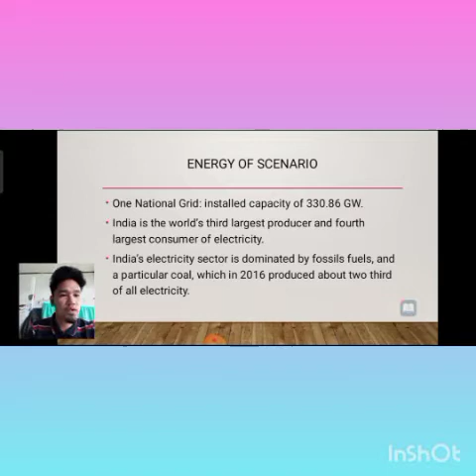India's electricity sector is dominated by fossil fuels, particularly coal, which in 2016 produced about two-thirds of all electricity.

Thermal power plants. A thermal power plant is a power station in which heat energy is converted to electricity. Typically, water is heated into steam, which is used to drive an electrical generator. After it passes through the turbine, the steam is condensed and recycled to where it was heated.

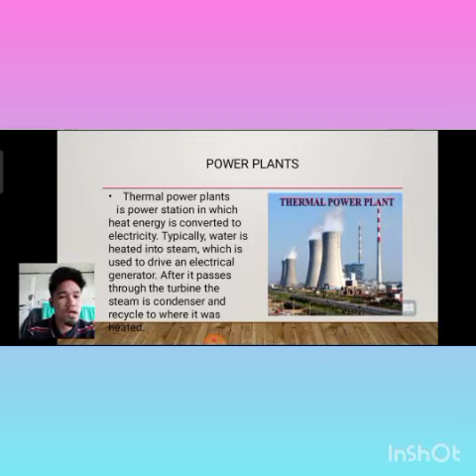Hydropower plant, also known as water power, is the use of falling or fast running water to produce electricity or power machines. This is achieved by converting the gravitational potential or kinetic energy of a water source to produce power. Hydropower is a method of sustainable energy.

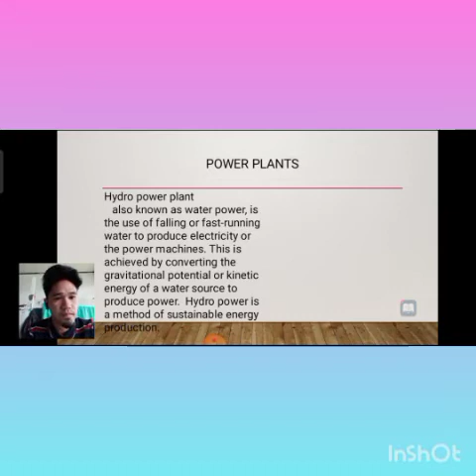Steam power. Steam power plants consist of a boiler, steam turbine, generator, and other auxiliaries. The boiler generates steam at high pressure and high temperature. The steam turbine converts the heat energy of steam into mechanical energy. The generator then converts the mechanical energy into electrical power.

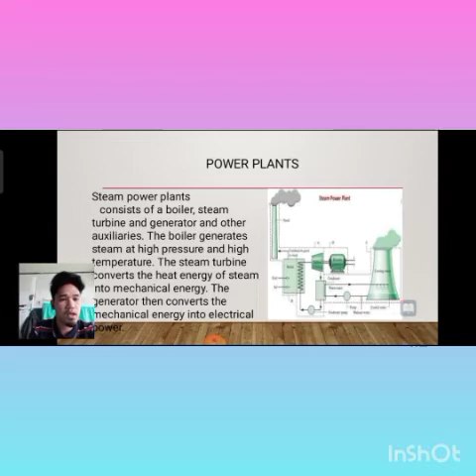Gas power plants. A gas-fired power plant, or gas-fired power station or natural gas power plant, is a thermal power station which burns natural gas to generate electricity. Natural gas power stations generate almost a quarter of world electricity and a significant part of global greenhouse gas emissions and climate change.

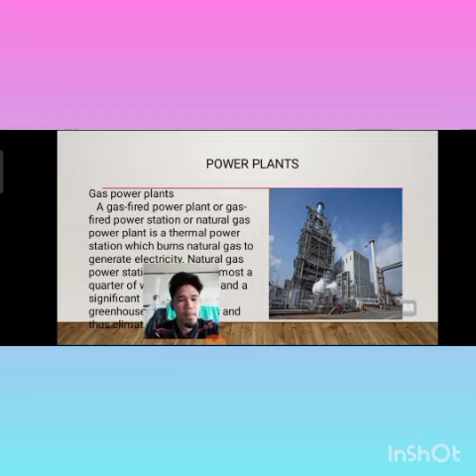Hydroelectric power plants. Hydroelectricity or hydroelectric power is electricity produced from hydropower. In 2015, hydropower generated 16.6% of the world's total electricity and 70% of all renewable electricity, and was expected to increase by about 3.1% each year for the next 25 years.

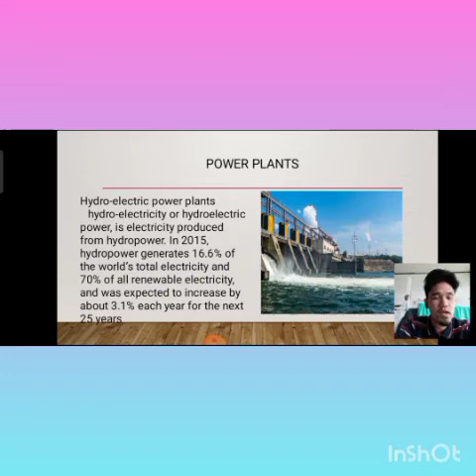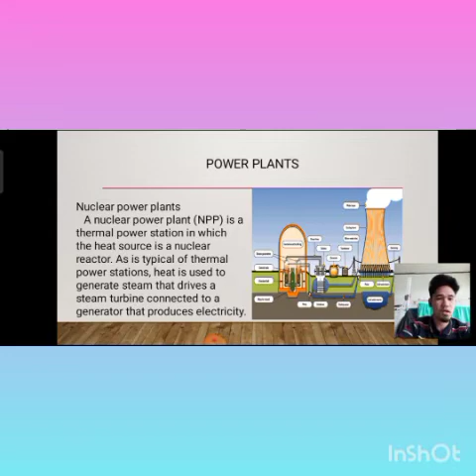Nuclear power plants. A nuclear power plant, or NPP, is a thermal power station in which the heat source is a nuclear reactor. As is typical of thermal power stations, heat is used to generate steam that drives a steam turbine connected to a generator that produces electricity.

Law of thermodynamics deals with the concept of heat and temperature and their conversion into other forms of energy. I will discuss this law of thermodynamics in another video, as a separate discussion.

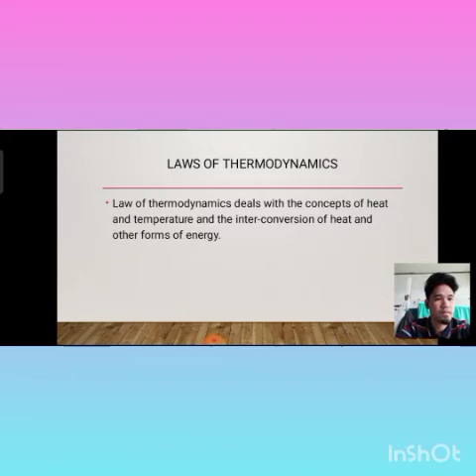Water. Hydropower or hydroelectric power is a renewable source of energy that generates power by using a dam or diversion structure to alter the natural flow of a river or other body of water.

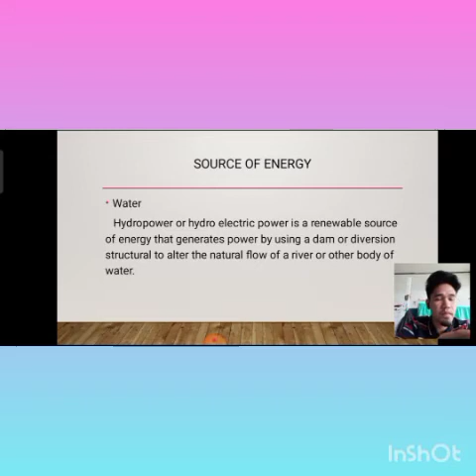Nuclear. Nuclear is a zero-emission, clean energy source. It generates power through fission, which is the process of splitting uranium atoms to produce energy. The heat released by fission is used to create steam that spins a turbine to generate electricity without the harmful byproducts emitted by fossil fuels.

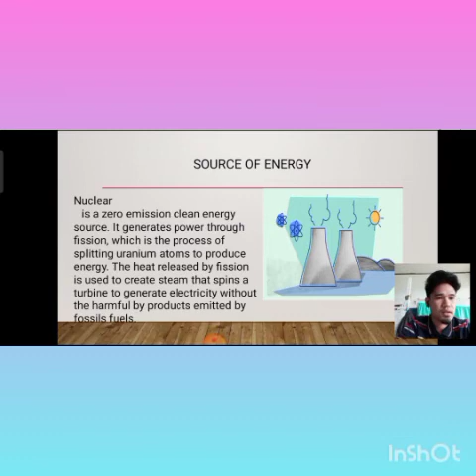Wind power is the use of wind to provide mechanical power through wind turbines to turn electric generators for electric power. Wind power is a popular, sustainable, renewable energy source that has much smaller impact on the environment compared to burning fossil fuels.

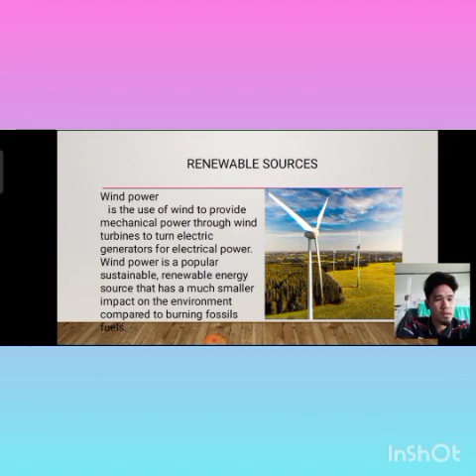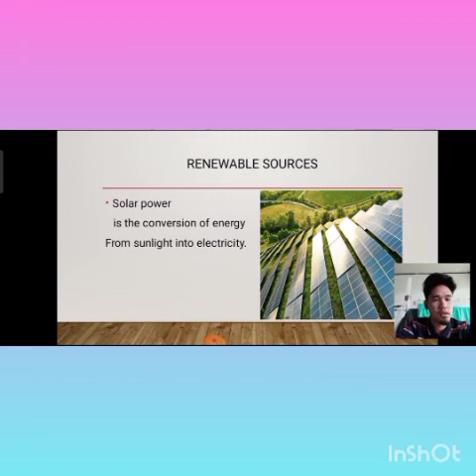Solar. Solar power is the conversion of energy from sunlight into electricity. Tidal power is harnessed by converting energy from tides into useful forms of power, mainly electricity, using various methods.

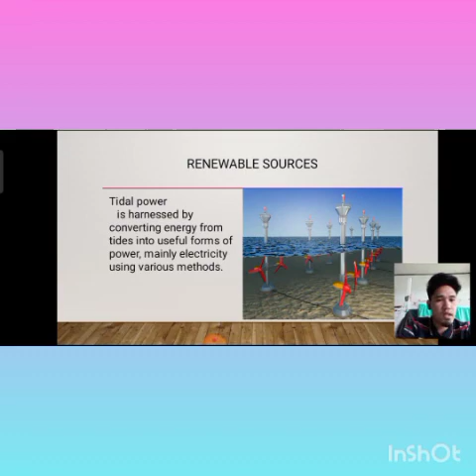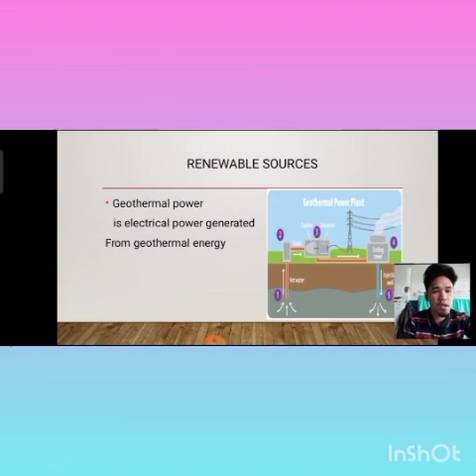Geothermal power. Geothermal power is electrical power generated from geothermal energy.